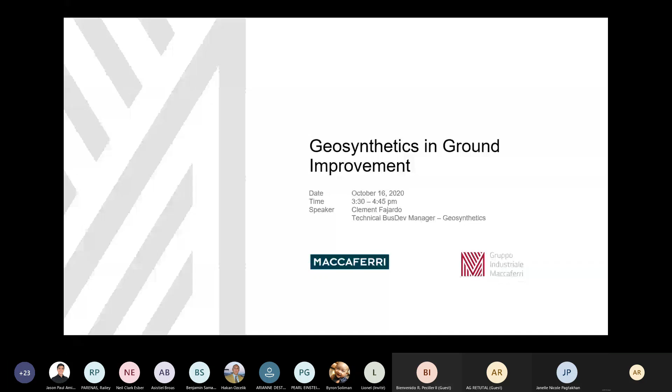So again, good afternoon, everyone. It is again my pleasure to welcome you all to Maccaferri's webinar. My name is Clement Fajardo, and today we'll be discussing one of the most interesting topics in geotechnical engineering, and that is geosynthetics in ground improvement.

So an overview of the topics we'll be tackling today. I'm quite certain that many of our audience today already have an idea of these: prefabricated vertical drains, bearing capacity improvement using GeoGrid foundation raft, basal reinforcement, and GESC.

So what we're going to do today is show you the advantages of using these new systems as alternatives to other ground improvement methods, such as piling, grouting, soil nailing, cement chemical mixing, and etc.

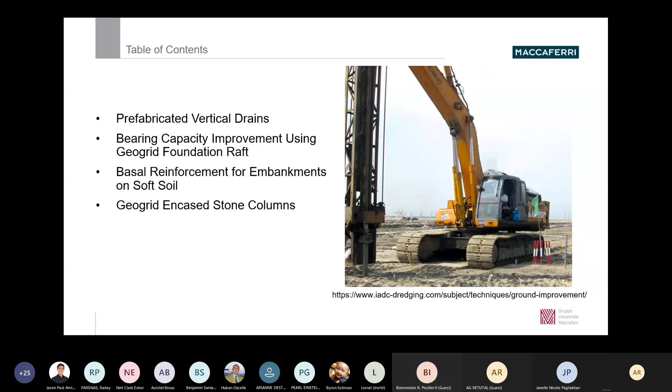So to start it off, let me first define geosynthetics. These are planar products manufactured from polymeric material used with soil, rock, earth, or other geotechnical related material as an integral part of a civil engineering project, structure, or system. So they are made up of polymers, steel and fiberglass, and other natural materials.

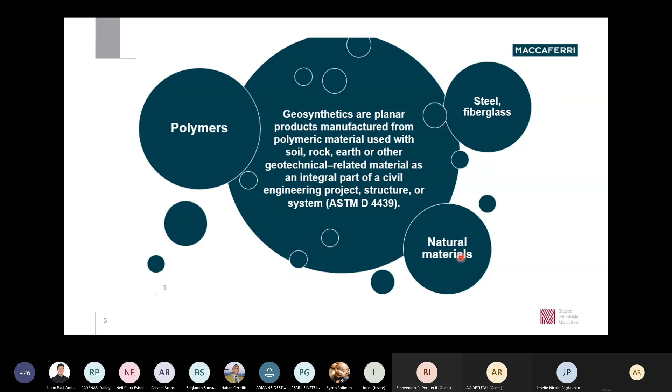In today's world, geosynthetics have already transformed geotechnical engineering to the point that it is no longer possible to do geotechnical engineering without geosynthetics. Because it has become very popular due to its wide range of applications, we now have many functions of these geosynthetics. These include separation, filtration, drainage, reinforcement, and barrier and erosion protection.

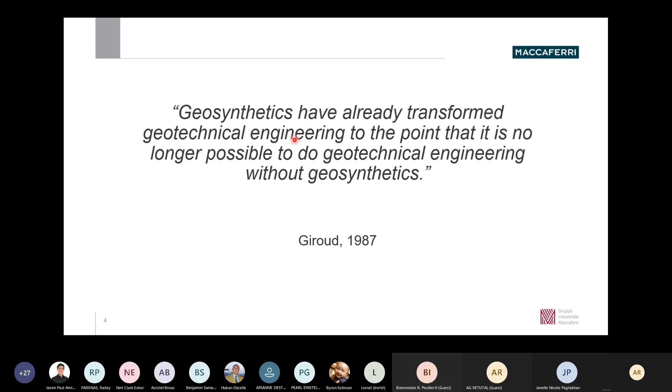So now, with that being said, let us move on to one of the oldest methods in geosynthetics, the prefabricated vertical drains. Another name for this, by the way, is wick drains. This method is actually quite old. It was established in the 1980s, which originally replaced the sand drain method.

So the primary function of these PVDs is to accelerate the primary consolidation. In other words, its use is to decrease the overall time required for the completion of primary consolidation due to preloading. So this is your surcharge load, and these are your prefabricated vertical drains.

What's going to happen is, because these drains have higher permeability than the surrounding soil, water will seep towards the top and then be drained through this drainage here.

Another function of this is it will decrease the amount of surcharge required to achieve the desired amount of pre-compression in a given time, and because of this, you will have an accelerated consolidation settlement.

To further show that, vertical drains such as this can also be used as pressure relief wells. By adding these vertical drains, we can reduce pore water pressures or excess pore water pressures below the natural slopes or below your surcharge load.

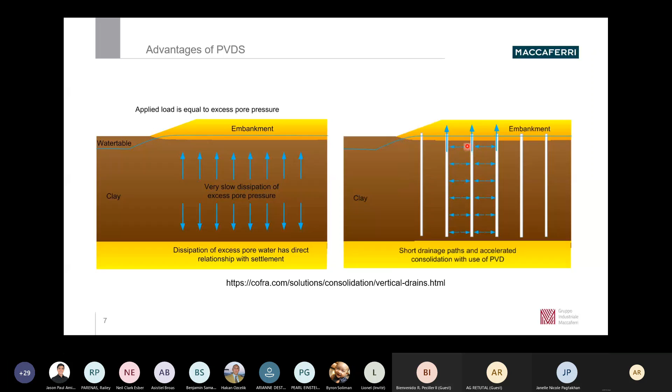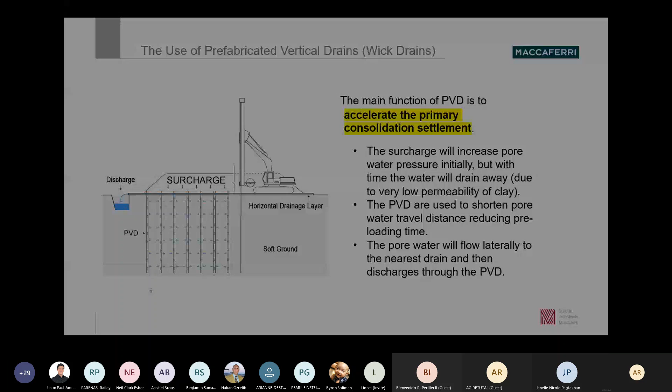In other words, you can also have a lower surcharge load or lower embankment because of these vertical drains, so this will entail project savings. You'd have higher project savings.

So it all started with Terzaghi's 1D theory of consolidation. He said that the total consolidation settlement is time dependent. So the settlement occurs in a given time after construction, and the time taken for settlement will decrease.

So there are two ways to get the properties for your settlement, right? Either you can get the settlement parameters using SPT correlation data, or you can get it using the oedometer test.

The parameters we use in order to get the settlement would be mainly three: the coefficient of consolidation, coefficient of compressibility, and the compression index.

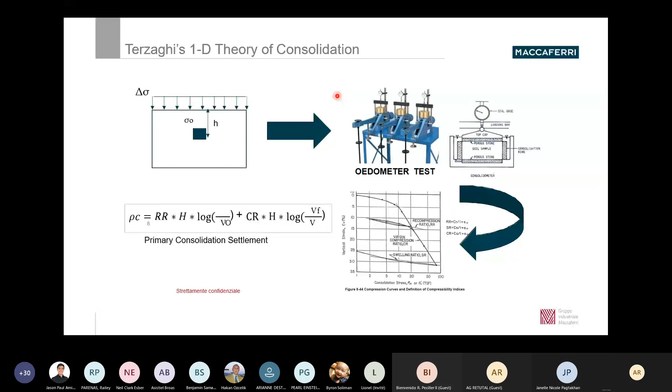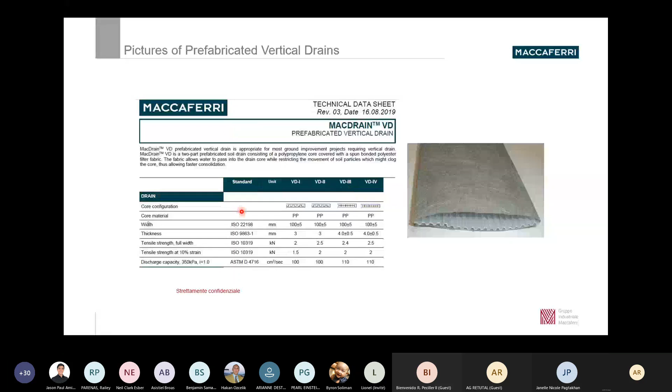So this is a product of Maccaferri, the prefabricated vertical drain, the MacDrain VD, and here are the technical specifications. So we have 4. Whichever you would use would depend on the requirements of the project.

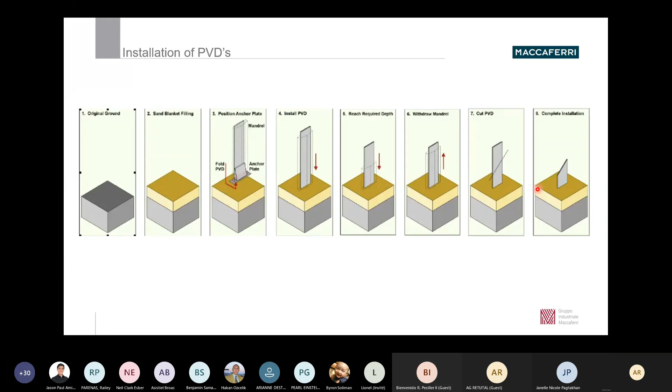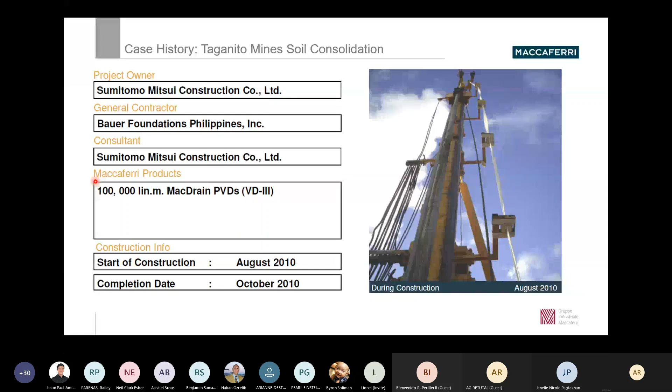So this is Taganito Mines, located in Surigao del Norte. What happened here was because of the thick deposits of clay soils and the presence of shallow groundwater, the best way to mitigate this was by using PVDs.

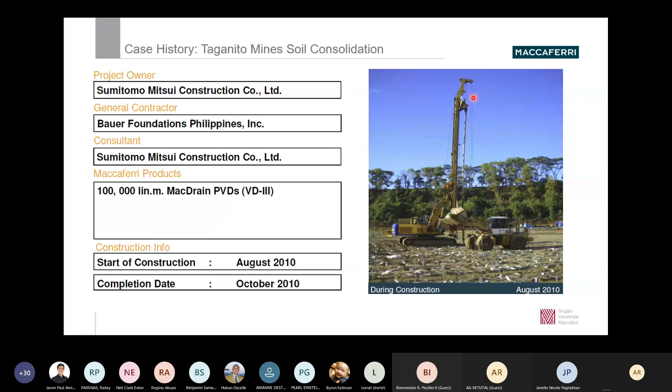And this is a picture of the ongoing construction of the PVDs, our installation, and this is near completion, and the final product will be here.

So by the way, there are two patterns: you can use either square pattern or triangular pattern in installing these PVDs. Here, I think we use square.

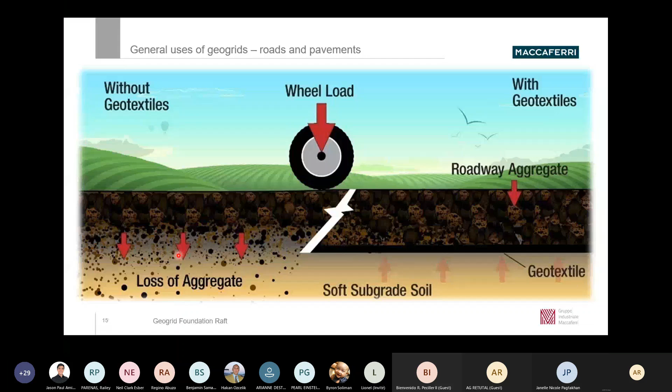All right, next we're going to move on to the GeoGrid Foundation Raft, bearing capacity improvement using GeoGrid Foundation Raft. As we all know, one of the most common uses of geogrids is in road construction. Geogrids can serve as a construction aid over soft subgrades. It can also improve or extend the pavement's projected service life and reduce the cross-section for a given service life. So this is without the geogrid, this is with the geogrid.

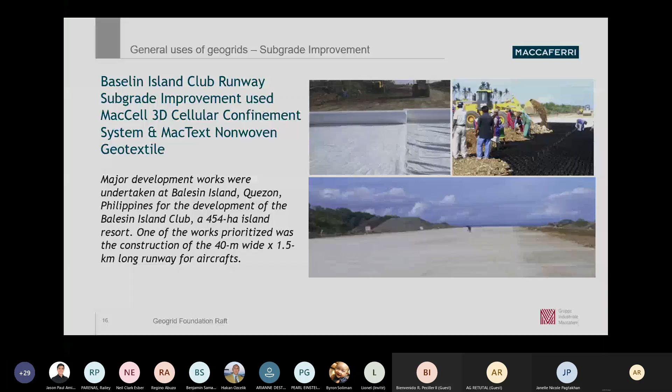Next, another common use for the geogrids is for MSE walls. So this project was with Steel Asia, which included retaining wall reinforcement, steep reinforced slopes, and reinforcement in a variety of landfill applications. Here we supplied the MSE wall, as you can see here.

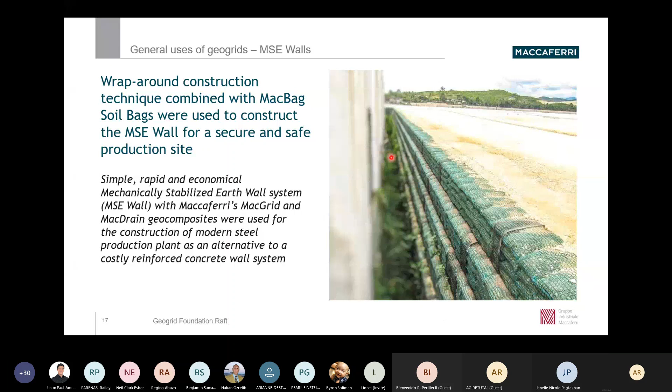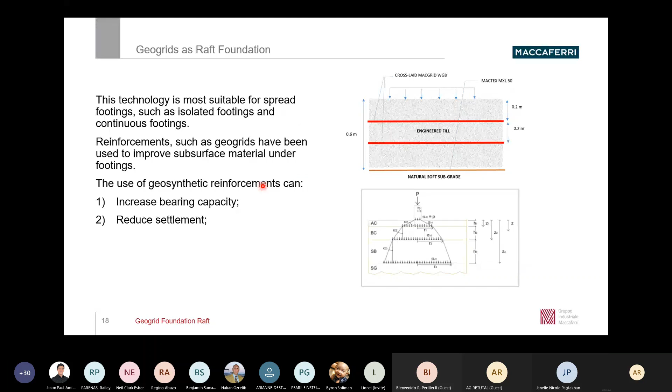This technology is most suitable, and can also be used for shallow foundations or to improve the subgrade material underneath the footing. So you would be able to do two things with this system: increase the bearing capacity and reduce the settlement.

On this left figure, you can see two scenarios: unreinforced subsurface material and reinforced. To determine the effect of these geogrids with respect to applied pressure and settlement, look at this figure. They conducted plate load testing on both unreinforced and reinforced foundations. We can see that with geogrids installed, you have higher applied pressure with respect to settlement compared to the unreinforced subsurface material.

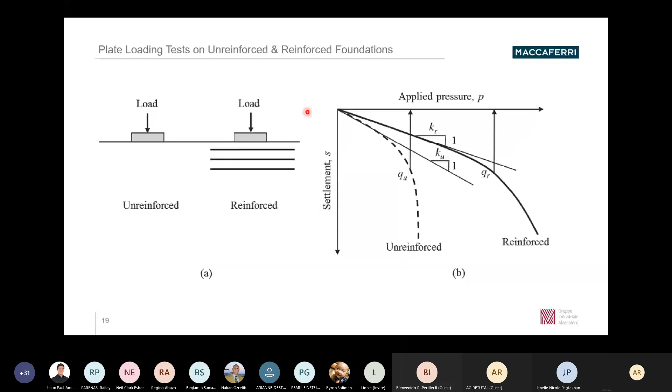Now, the bearing capacity of unreinforced road on soft clay subgrade is shown here. These are formulas for roads. Though it's not for the foundation, we can see that the bearing capacities increase twofold right here. If you do not have the undrained cohesion, there's an empirical formula you can use. If you have the CBR, the California Bearing Ratio, you multiply that by 30.

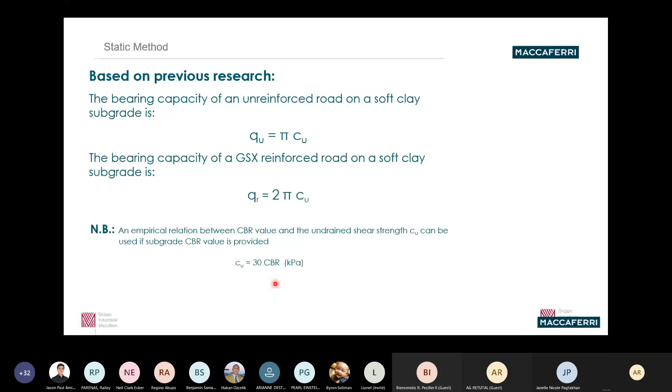This is the design mechanism applied when designing a geogrid foundation or geogrid raft below the foundation. As you can see here, the load spreads through the layers according to their spreading angle. There's a particular spreading angle right here.

The reinforcement function has been shown to fall between two main mechanisms: tension membrane, and lateral base course restraint, which is your engineered fill. In the first layer, at the interface with the subgrade, it is subjected to the highest amount of vertical deformations. So when the first soil layer is spread and compacted due to settlement of the subgrade, the next geo layers are far less subjected to displacements because of this load distribution.

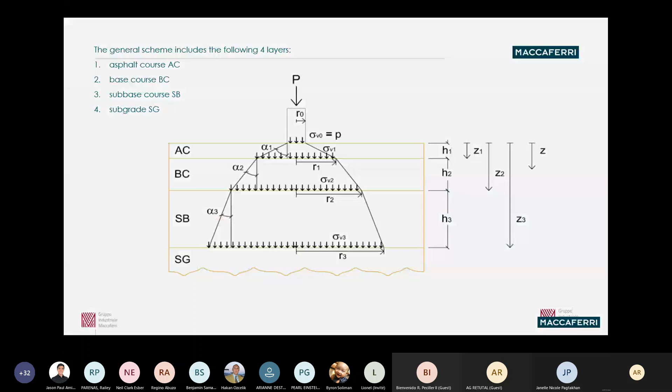Similarly with roads, this can also be applied to your shallow foundation. The effect of using geogrid on road improvement, which can also be applied to raft foundation, means you can either increase the number of passes while maintaining the respective depths or thicknesses of the layers, or if you want to save a lot in your project, you can reduce this and still have the same performance.

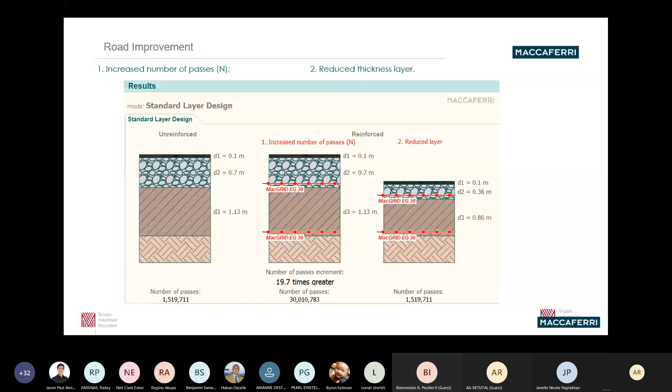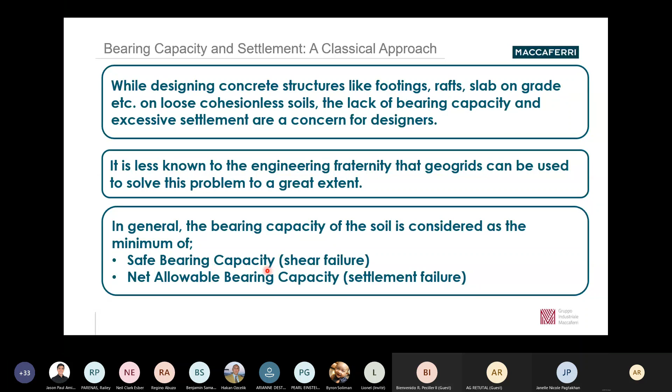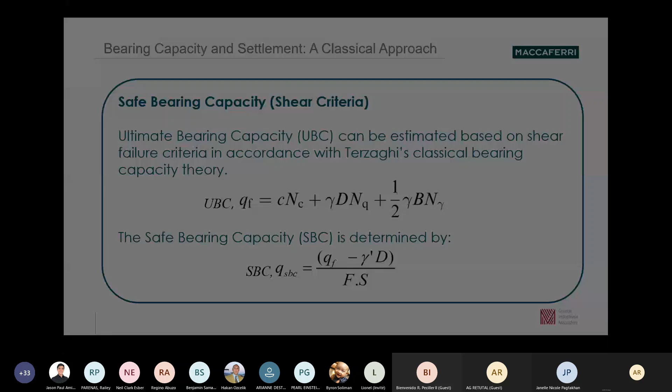When we have weak soils, we must opt to use different ground improvement methods to increase bearing capacity. As we are already aware, for bearing capacity we consider two things: shear failure and settlement failure. For the shear criteria, we use Terzaghi's classical bearing theory, which considers shear. To consider settlement, we use the modified Schmertmann and Hartman method for foundation settlements in cohesionless soil below structures, which is shown right here.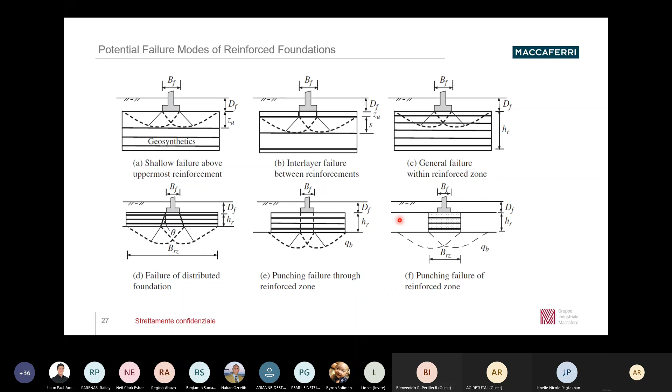And the last one occurs when there is punching of the reinforced zone. This happens when your reinforced zone is too thin or it's not widespread throughout the entire foundation or footing.

So for you to be able to compute for GeoGrid raft foundation, the first step is just to calculate the net allowable bearing capacity. You have to consider, as mentioned before, the criteria for shear and settlement. The next step, which is more of a hit and miss, is to estimate the thickness of the fill, and then set a particular spacing of your geogrid raft. So you can estimate at 0.6 thickness, then place one geotextile or geogrid layer at 0.2 below the foundation, then another one after that at 0.2. It's up to you because this is a hit and miss process.

Now, there's a note on number 4 that says if you're dealing with an isolated foundation, since there are many and it's not continuous, the best way to minimize the differential settlements would be to lay the geogrid on the entire footprint of the building. So to give you a quick example, if the red is your geogrid and that is your foundation footprint, it would be best to install your geogrid foundation like this, in top view. With this, you can increase your bearing capacity in addition to reducing the number of settlements.

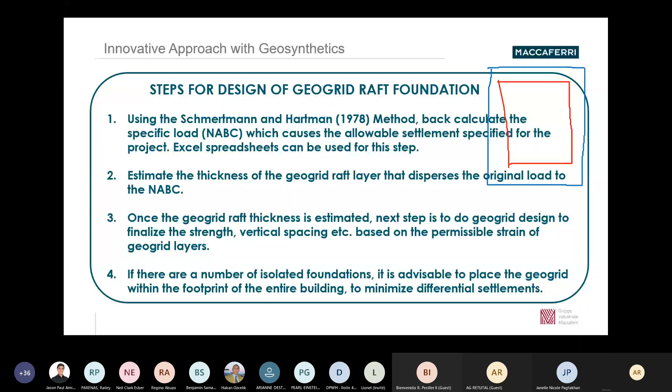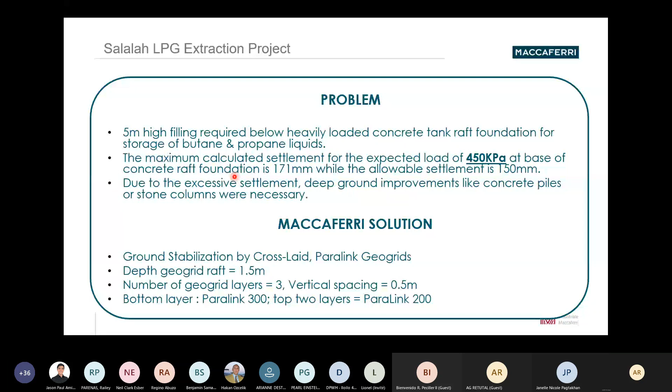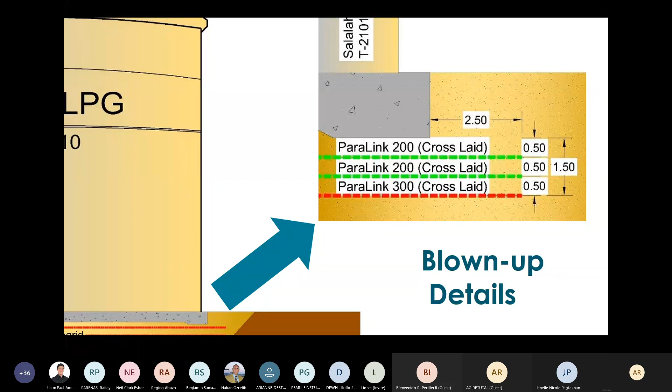This is the blown up detail of the configuration of the Paralink geogrids. We had Paralink 200, two layers of Paralink 200, and one layer of Paralink 300, all cross-laid. The thickness of the entire configuration was set at 1.5 meters thick, and the spacing per geogrid was set at 0.5, 0.5, and 0.5. As you can see here, this is the offset we took that was set for this project.

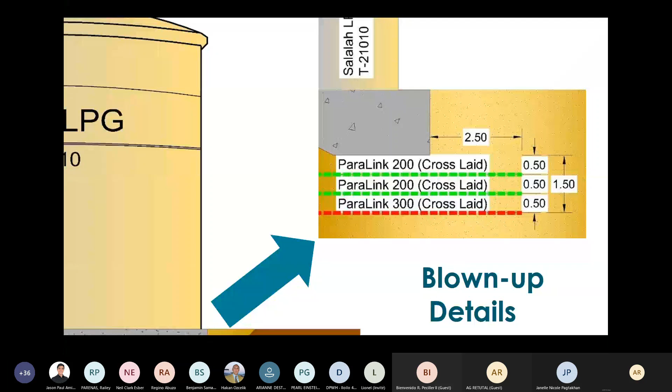Now, with regards to the design, we started at 450 kilopascal, and the estimated total settlement below the tank foundation was 171 millimeters. Now, due to the distributed load effect given by the geogrids, the pressure at this part was reduced from 450 to 396, and even your settlement was reduced from 171 mm to 149 mm, which I think the settlement requirement for this project was 150.

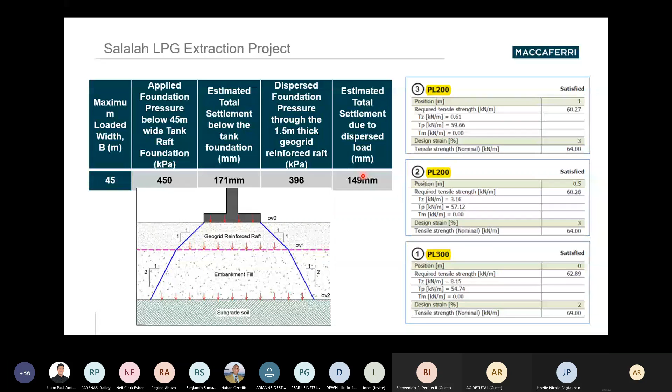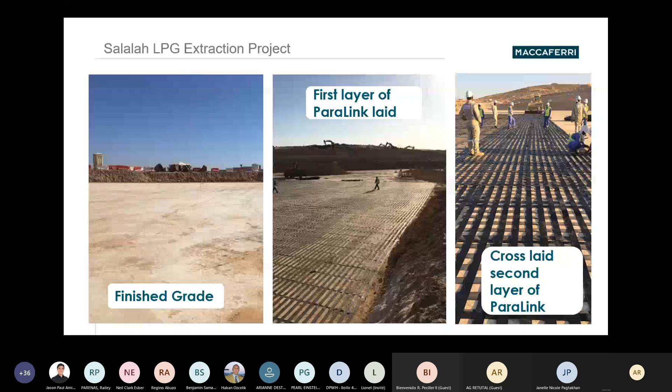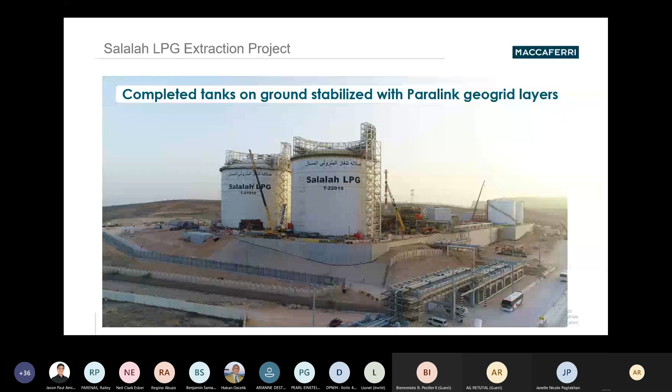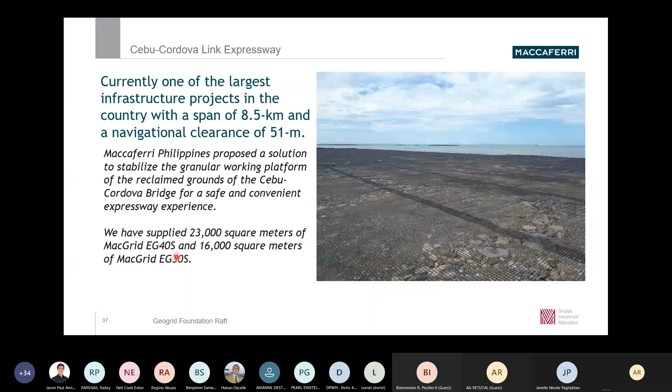Another project where we used this was in the Cebu-Cordova Link Expressway. What we did here was propose a solution to stabilize the granular working platform. The bridge will have two layers. Sorry, the product we used was the MacGrid EG, an HDPE grid. Maccaferri supplied 23,000 square meters of MacGrid EG40S and 16,000 square meters of MacGrid EG30S.

The client wanted a safe and durable working platform that would support the heavy straddle carriers during the launching of the bridge girders in the causeway, so this is how we mitigated that. This was with Spanish contractor Acciona and Philippine firms First Balfour and DMCI.

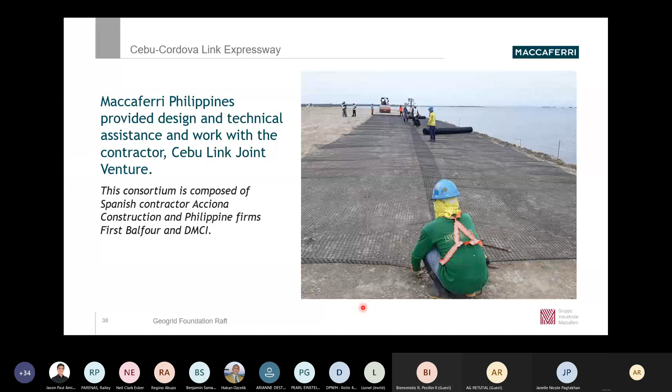What you can learn from this or from our past projects is that you can definitely reduce the settlement and increase the bearing capacity, and you can confirm that using the plate load test or zone load test. This is usually advisable for cohesionless soils only, which undergo elastic settlement, because we're using the formula from Schmertmann.

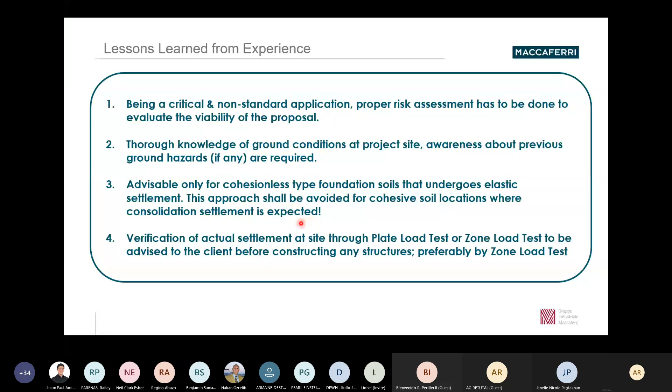So our next topic would be basal reinforcement.

When you're dealing with embankments, there are a lot of problems you can encounter. We have ground heaving and separation of soil. When you have low initial undrained shear strength, you have a high water table, it also addresses problems with stability and a lot more.

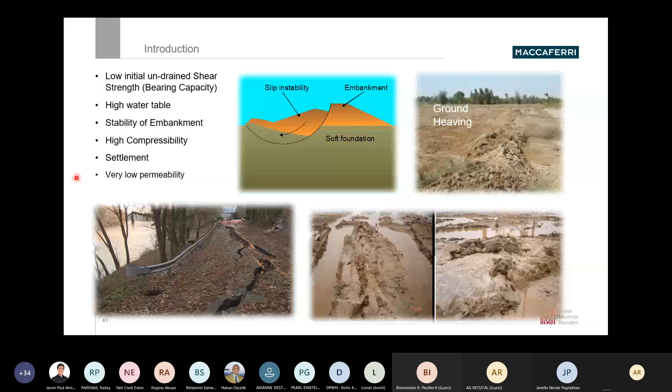So what the geosynthetics do, or the alternative to these problems you see right here, is basal reinforcement using geosynthetics, by adding a layer of geosynthetics here.

You would get a lot of benefits. First, you can have an increase in the design safety factor, so you'll be more confident in your design. You can also increase the height of your embankment, so you can add more load by adding more fill material. You can also reduce the displacements during construction, and a lot more.

And because of this, because the problems are mitigated quickly by these rafts or by the basal reinforcement, you can decrease your construction time.

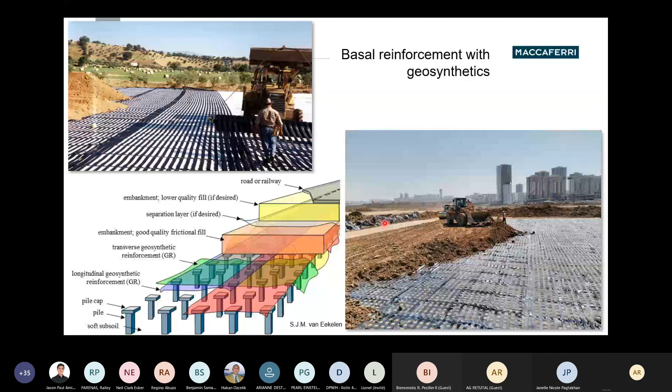So basal reinforcement can be used on weak foundations to improve embankment stability. On top of piles, it can be used to distribute the load and optimize the pile design. And of course, over sinkholes, to support embankment load.

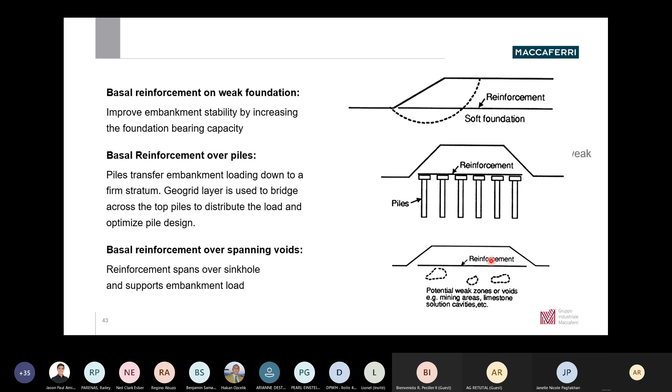So if you have sinkholes here, you can just lay a layer of geogrids and you can address those problems real quick. This is the same picture, but just for better visualization.

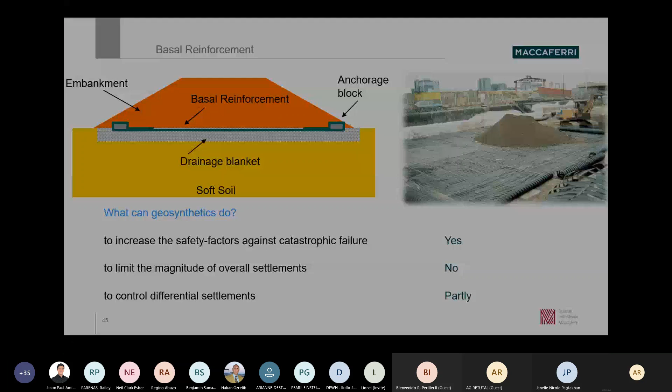So when you place a basal geogrid right here, you can increase the stability factor or factor of safety with respect to the rotational stability of the embankment, sliding stability, overall stability, and even the foundation extrusion stability, as you can see in this next slide.

So by adding this layer of geogrid here, you would reduce the susceptibility to foundation extrusion. You can decrease the susceptibility to lateral sliding, and because you actually improve it quite a bit, you would decrease the probability or susceptibility again to rotational failure, including the global stability.

And of course, because of this geosynthetic right here, you would have not less settlement, but the rate of settlement will be controlled.

But take note, these factors are generalized. The factors that would govern the design would still depend on things like the geometry of the embankment, the stiffness of the reinforcement, the loading rate, soil type or soil stratigraphy, and characteristics basically of your embankment. But on a generalized view, to generalize everything, this is what you can get out of basal reinforcement.

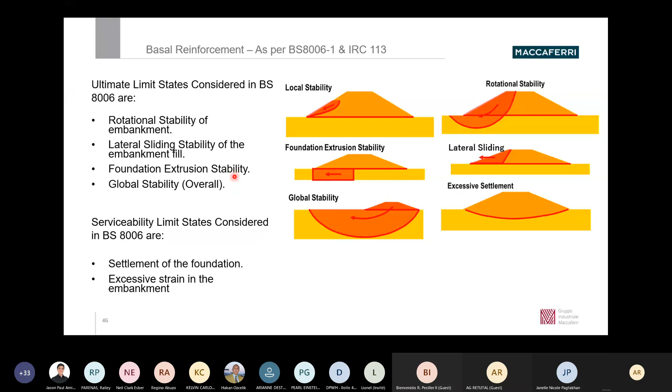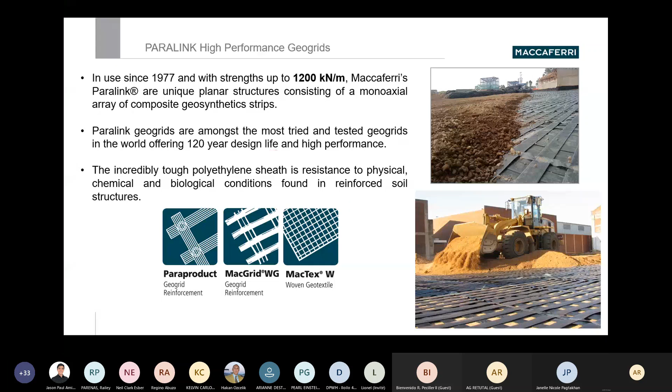So here we have strengths of up since 1977. Our basal reinforcement has strengths up to 1200 kilonewtons per meter. It has high resistance to physical, chemical, and biological conditions, and also its design life is 120 years. So these are the products Maccaferri currently has.

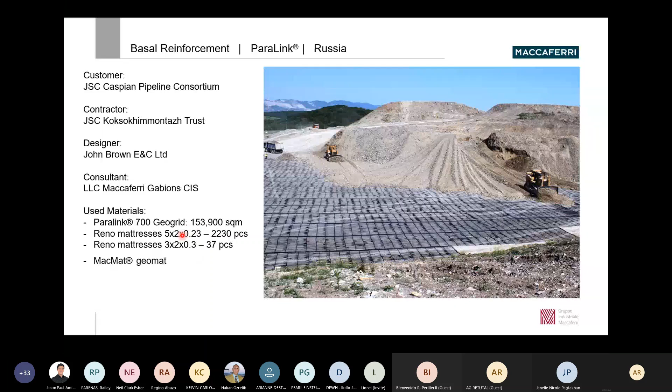So this is basal reinforcement for a project we did in Russia. Basically, we supplied 153,000 square meters of Paralink 700 geogrid.

So now let's move on to the geogrid encased stone columns.

So stone columns are used for both cohesive soil and silty sand, to increase the strength and decrease the compressibility. This method involves inclusion of sand or stone into the geogrid and then encasing it with geogrids, as you can see right here.

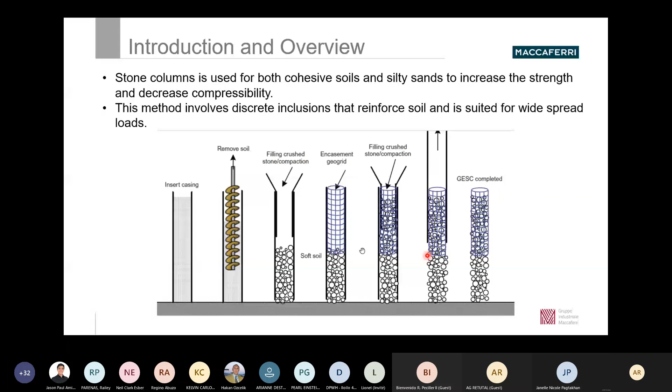So first, removal of soil, then compaction of the stone material. Then you would have the encasement of the geogrid here, and then removing of the casing, and there you go, it's completed. The advantages of this method are quite a handful.

So you would reduce the shallow foundation settlement, increase the bearing capacity and allow reduction in the footing size, and mitigate the liquefaction potential. So unlike other methods, for example the geogrid foundation raft, it directly mitigates or has a direct effect on increasing stability against liquefaction.

It also provides slope stabilization, permits the construction on fills, and prevents earthquake-induced lateral spreading.

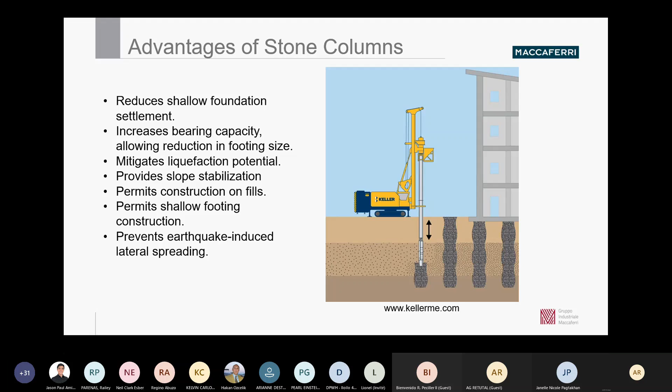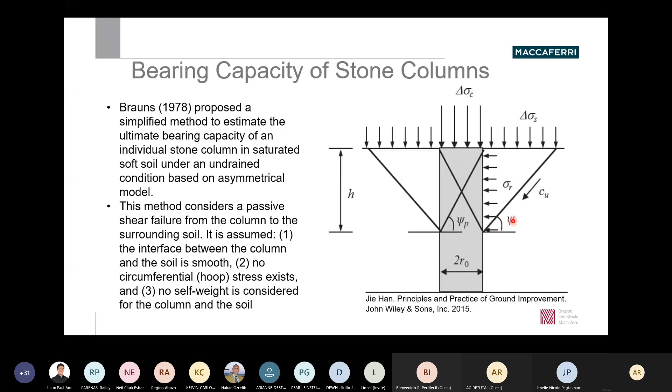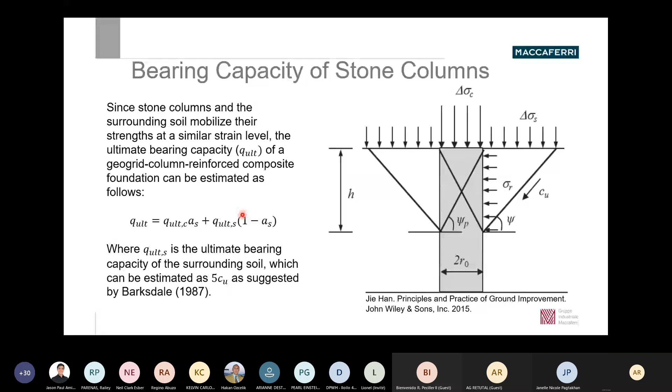So our solution again is to reduce settlement and increase bearing capacity. You can also accelerate consolidation settlements. Now, geogrid encased stone columns are water permeable, so this can also be used as wick drains, functioning to promote consolidation.

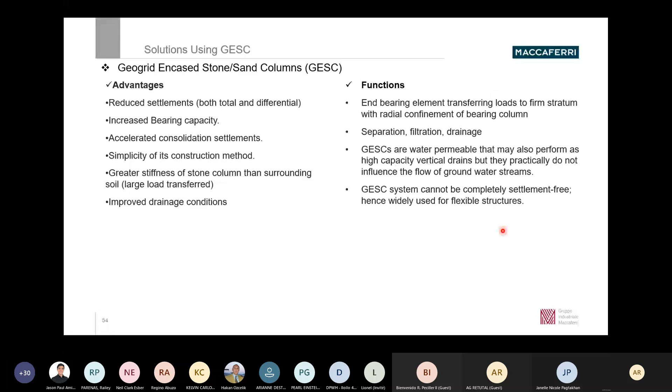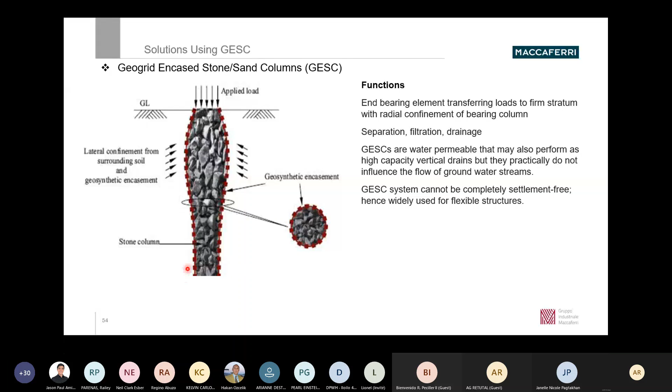The GESC system cannot be completely settlement free, that's why we also compute for total settlement. As illustrated previously, you would have an increased lateral confinement here on the 2D or 3D area. That's why it would be best to encase the geogrid up to this point, or better, the entire thing, which we will discuss further.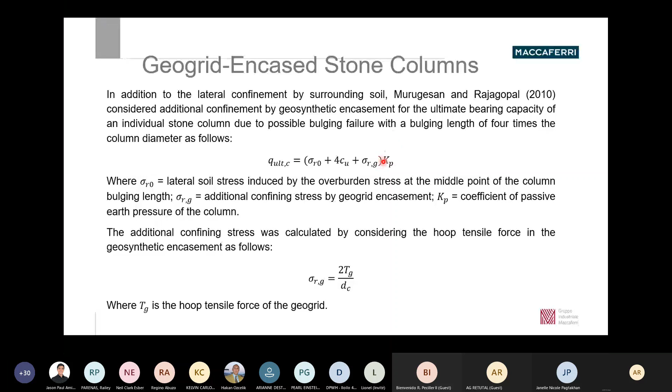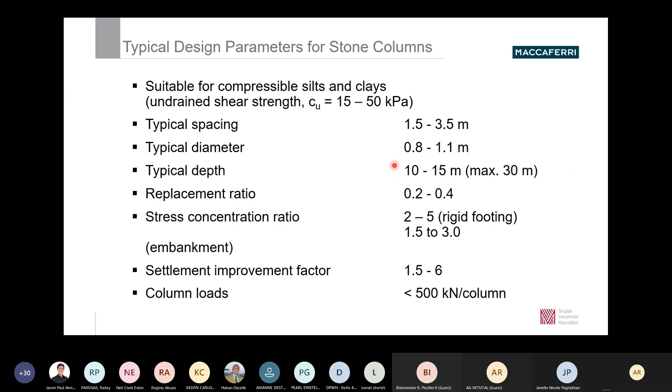Okay, so the performance of geogrid encased stone columns. C. Yoo and D. Lee published an article focused on compressive load tests, performed using steel reaction beams with a pair of anchors, done on two types of ground improvement measures: the stone column and the RAP, or rammed aggregate pier. For the load test, they used a 300-ton capacity hydraulic jack positioned on the concrete circular footing.

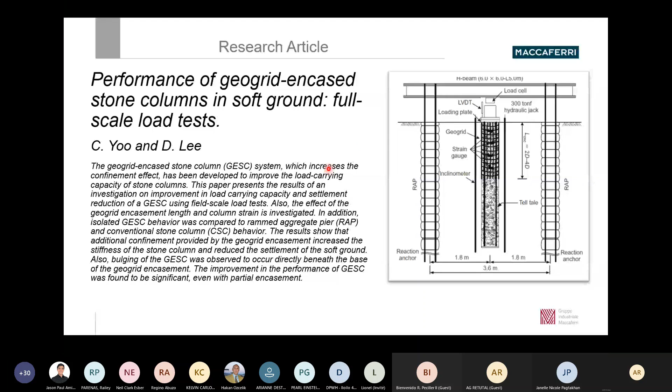I will now discuss the results quickly. They did that on two sites, the Gimhae site and the Pohang site. Here are the stratigraphy or sections of the subsurface material - here you have silty clay, and here you have clay sand. That's the difference between the two.

Now, what we have right here is the comparison of the rammed aggregate pier versus the geosynthetic encased stone columns. As you can see, the GESC and the GESC 2D - the 2D and 4D mean they encase the columns here, 3D from the top being 3 times the diameter, and 4D being 4 times the diameter right here.

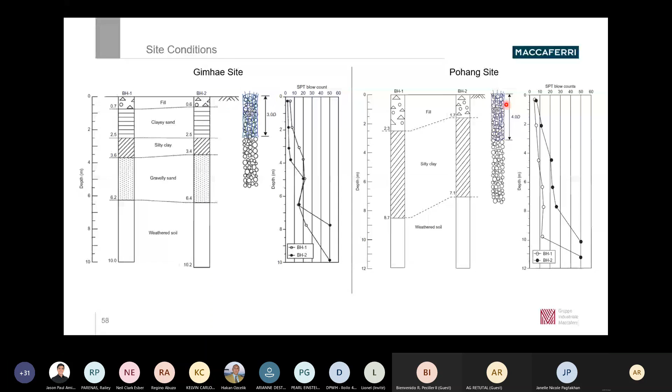So you can see the results that you would have less settlement because of this, since the bulging failure was already addressed using the geogrid on the column. Therefore you can increase the pressure, and the performance of the geogrid encased stone columns is at par with the rammed aggregate pier, because the RAP is also susceptible to bulging failures.

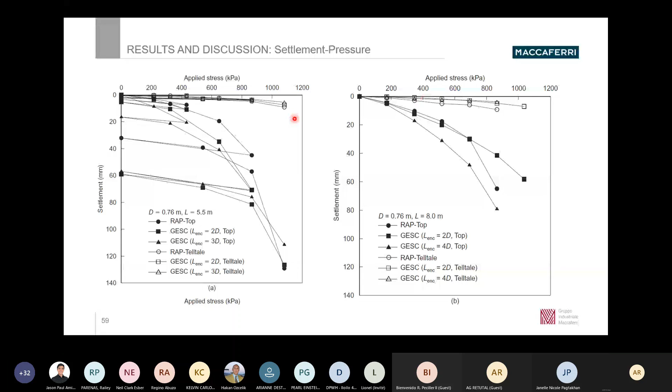Both the RAP and the GESC have a failure mode of bulging failure. This failure mode is addressed by the confining effect provided by the geogrid encasement. The recommendation in this article is at least 4D from the top, in case with geogrid, to maximize the reinforced effect of the geogrid.

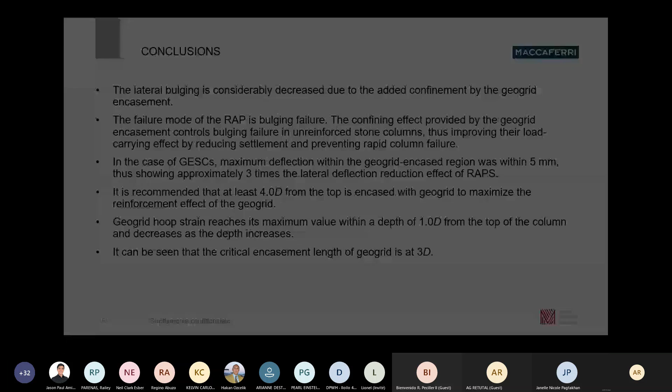As you can see in the figures here, the critical encasement length is 3D, or 3 times the diameter of the geogrid encasement.